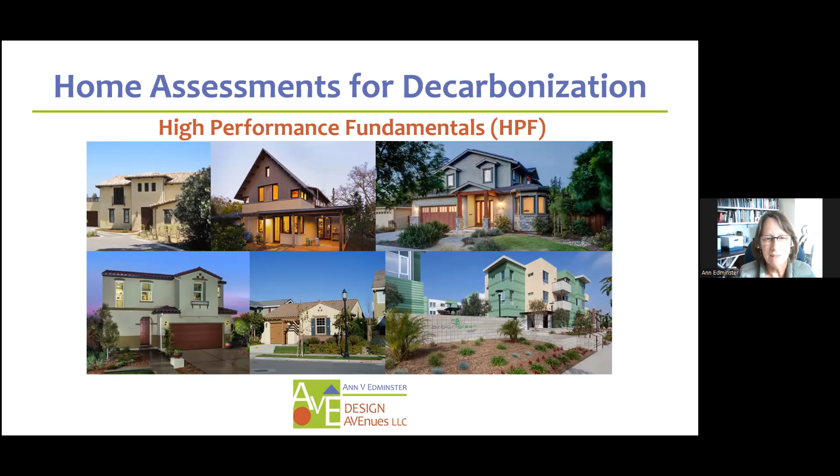So I just wanted to start with a little bit of setting expectations about the background that you all bring to this class, because we would love to be addressing a range of experience with the High Performance Fundamentals series. And so we do anticipate that anyone who's managed to get themselves here today has some knowledge and experience with buildings and systems. Ideally, you will have already participated in the first 5 classes in the High Performance Fundamentals series, although that is not necessary, but it will certainly give you a great foundation for what you'll hear today.

You may or may not have deep background in high performance building work yourself. But again, if you've gone through the High Performance Fundamentals series, you at least have, I think, an excellent grasp of what that field represents.

In working with prospective clients, the idea is that you may not be able to do everything that they are interested in accomplishing with their homes, but that you'll be able to guide them in crafting a roadmap for themselves. And in doing so, you'll clearly identify what you can and what you cannot do within that scope. And things that you can't do, you will assist them in identifying other professionals who can. So that's just kind of a context piece, and then we'll move on to the actual content of the presentation.

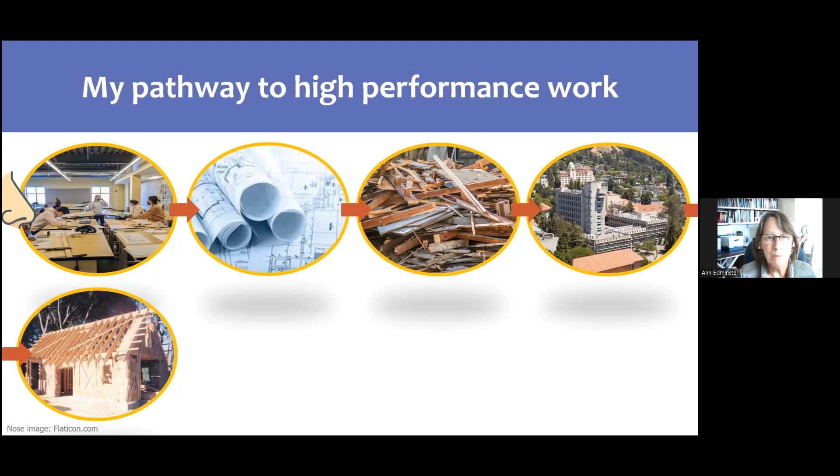So this is an aerial snapshot of UC Berkeley, where I did my master's work, where I focused on green building, which wasn't really even called green building yet at that time, but I chose to focus on energy, materials, and once again, residential architecture and sort of how all those fit together. During that time, I became really captivated with natural building methods. This is a snapshot of a straw bale building, one that I actually helped to build in those early days, the early 90s.

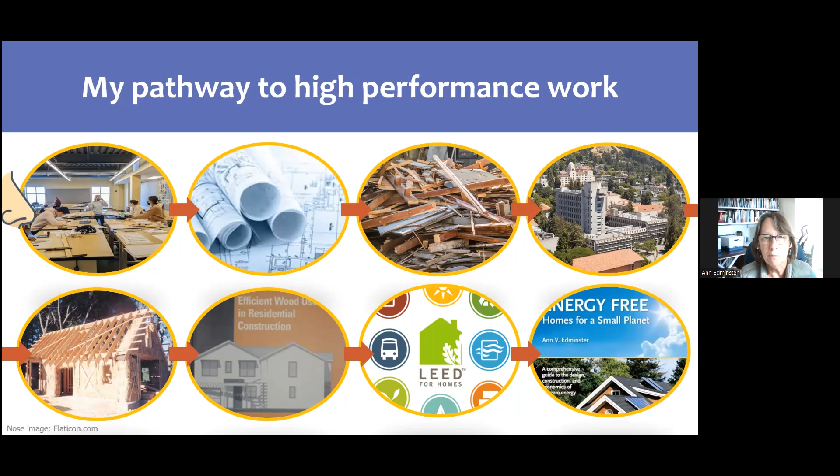Following that, I was recruited to work on the development of the LEED for Homes program for the U.S. Green Building Council. And that really broadened both my knowledge and my circle of acquaintances, and certainly depth of understanding about all facets of green building. It was tremendously valuable experience. And once the LEED for Homes program launched, I asked myself, okay, what's the next most important thing to work on? And for me, the answer was clear. It was climate. And that was back in 2008-9. And at that time, we were still using energy as sort of a proxy for climate in buildings. So I wrote this book, Energy-Free Homes for a Small Planet, which was published in December of 2009.

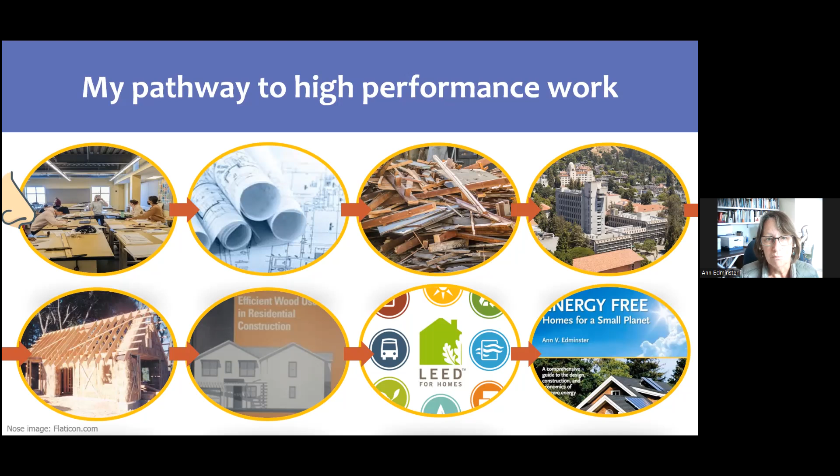And since then, I've been increasingly involved in education for the industry as well as for homeowners. So that led me through a long and winding path to working with my colleagues at 3C-REN, who have been tremendous partners in developing a lot of educational content. And one of the realizations of late has been, as the state makes its shift to addressing climate more and more aggressively, there's going to be more and more call for building professionals across occupations, whether it's trades, architects, engineers, energy raters, everyone sooner or later is going to be facing questions from their clients. What do I do to get the carbon out of my home, out of my lifestyle? So essentially, that's what brought us to this point today.

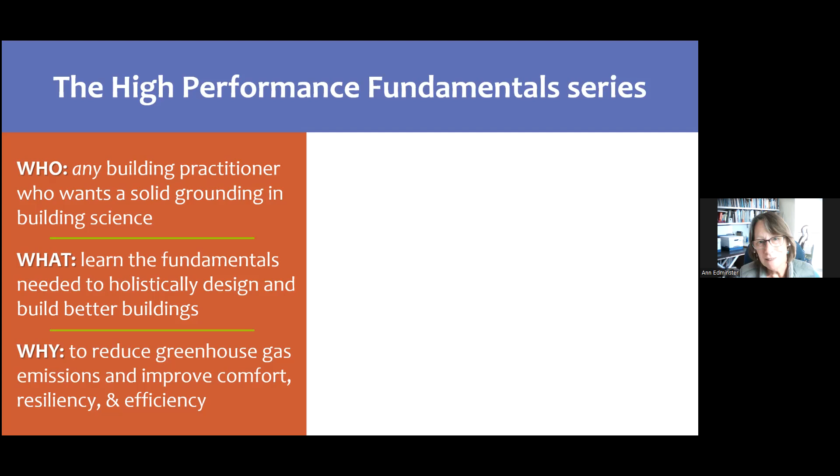Working with the 3C-REN team over the last couple of years, we've developed this High Performance Fundamentals series, working on the premise that building practitioners, broadly writ, will need, and hopefully soon will want, if they don't already have it, a solid grounding in building science. What that will enable them to do is more holistically look at the design and construction of buildings to produce better results that reduce greenhouse gas emissions while also improving comfort, resiliency, and efficiency. So that's kind of why we're doing what we're doing.

The result of that is this High Performance Fundamentals series, or HPF, classes 1 through 5, which you've probably already encountered or at least heard about through 3C-REN promotions.

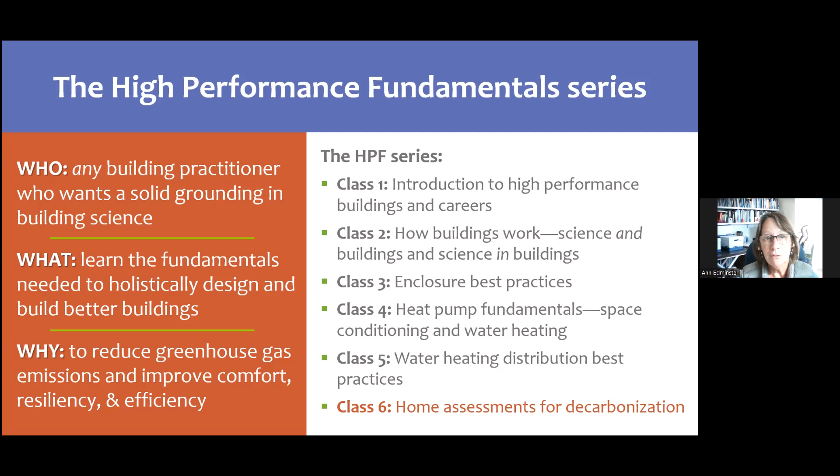And this one, the culminating class, ties it all back to the state's climate goals. Every homeowner, and some home residents who don't own their homes but will try to influence landlords, will be wondering what it means to decarbonize and how to go about that. Many of you are likely to be asked to assist in that process at some point in the foreseeable future.

In addition to the class series 1 through 6 that you just saw outlined on the screen, there are other elements we're talking about developing to enrich this program and enable participants to go much farther. First, we're going to offer a formal certificate of completion that will allow anyone who's taken all 6 classes to demonstrate to an employer that they've acquired this fundamental knowledge. We've heard from many stakeholders in the industry that they wish more of their prospective hirees had this background.

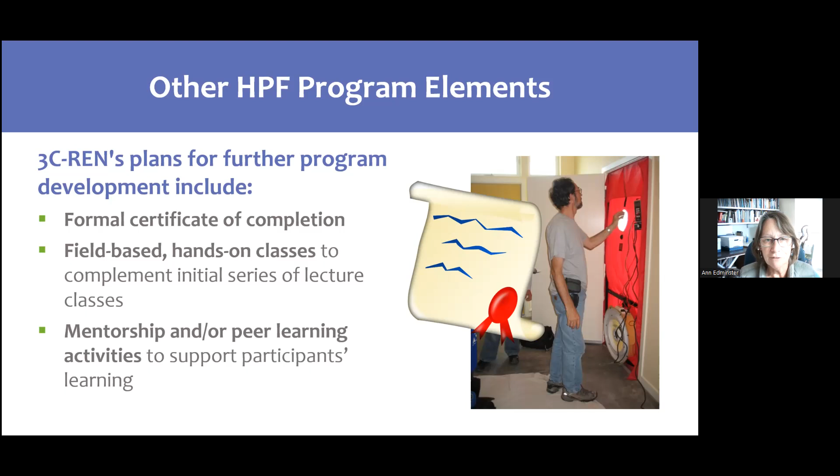And also a set of mentorship and/or peer learning opportunities that will support learning, not just in the classroom, not just on the job site, but through exchanges with other folks working in this field. Because we all learn from each other, and as much as you may have learned already, there's always more - it's a rapidly changing field. A very exciting field to be working in.

I've worked with Building Science Corporation for a couple of decades or more and have enormous respect for the pioneering work they've done, including a ton which is in the public domain because it's been funded through the US Department of Energy under the Building America program, among others. Building Science Corporation, buildingscience.com - I should have included their URL - is an amazing resource. I haven't actually included that as a link, but would certainly encourage all of you to go to their website and browse around, particularly the nerdier among you. I know there are some nerds out there.

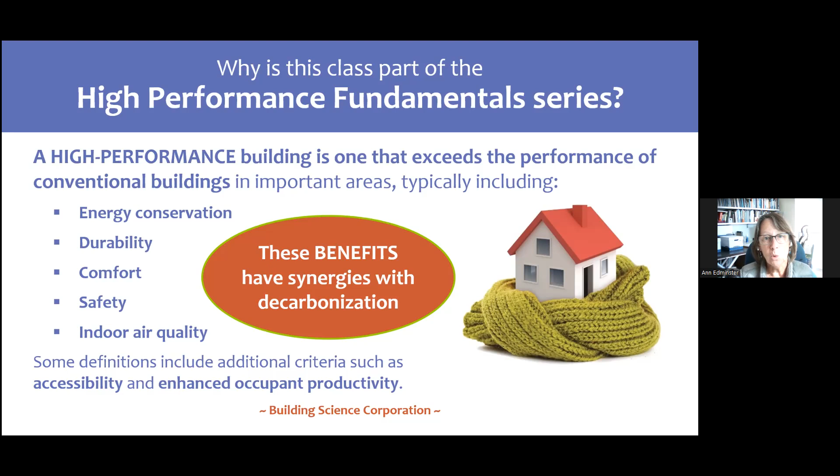So a little bit about those synergies. When we switch from gas to electricity, if we don't address high performance, we're missing these opportunities: we're missing the opportunity to reduce the necessary size of heating, ventilating, and cooling equipment we need. We're spending more money than we have to on that larger equipment. We're also committing our clients to eternally higher utility bills than they otherwise would have. And we've failed to resolve potential comfort issues, indoor air quality deficits, and condensation risks that may exist, and in fact do exist in many, if not the vast majority of, existing homes.

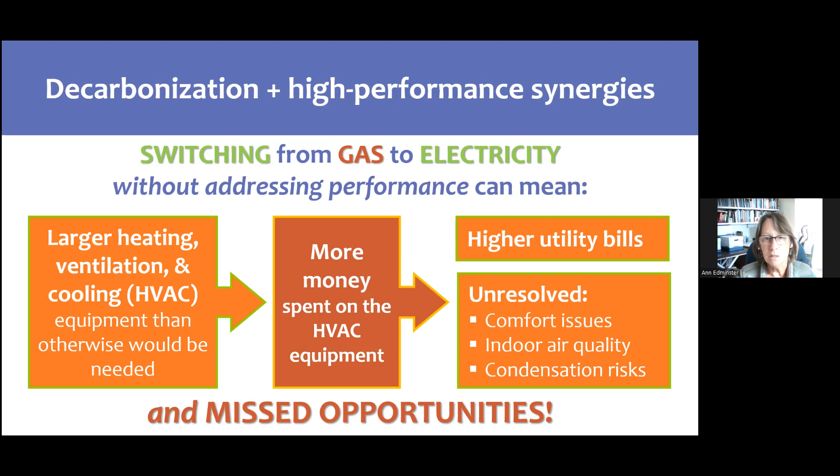So this is a really important opportunity not to overlook. That said, we won't be able to resolve everything. Existing homes are complicated creatures. So what this class will set you up to do is give you a process framework to walk through the mapping process with homeowners to create an electrification pathway.

We won't be delving deep into details of all these steps. It won't answer all the questions, so it won't make you an expert, but it will help you meet your client's electrification needs, whether directly yourself or by setting them up with this map of what to do next. And it will help you identify other resources, not just information sources, but people who can help the homeowners complete their projects.

So setting off on that question, well, when will decarbonization happen? Is this a tomorrow thing? Might be yesterday for some of you. But I think it's worth noting that there are more than 60 local jurisdictions just within California that have already tackled decarbonization of new construction. And the vast majority of those are already looking ahead and saying, okay, how do we begin to decarbonize our existing homes? So the majority of the existing housing stock.

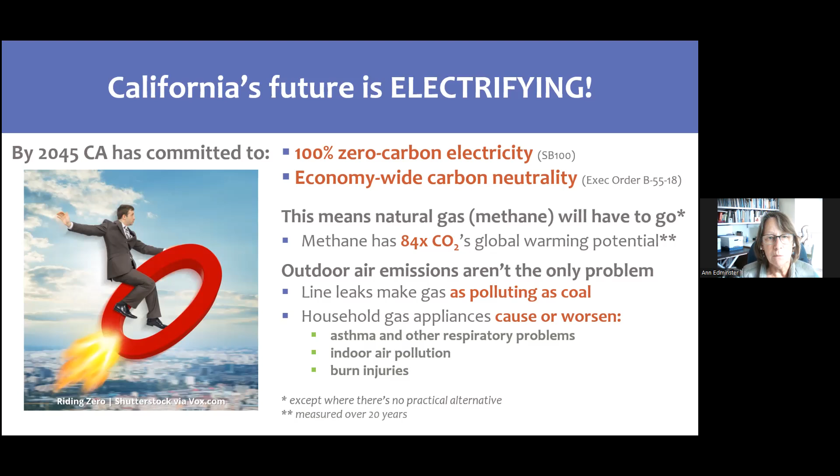So we have strong reasons to be moving towards electrification. And I think there are also great reasons professionally for looking at your future as being electrifying, double meaning intended. So we're seeing very fast changes happening, as I indicated with the local jurisdiction movements. There's an opportunity to really specialize in decarbonization - too many syllables. And some firms are beginning to do that already, and those firms are incredibly busy.

And they are offering those who are moving towards that specialization the opportunity to really focus on good work, making your clients' homes healthier, more resilient, and safer, as well as more planet responsible. So it's exciting to see these new business models emerging, and it takes some courage to step out and attempt that. But as I said, everyone I know who's working in this sphere is pedaling really, really fast, and many have months and months of advanced demand for the services they provide.

So now, why are clients asking for this? Certainly, a lot of the front runners, the early adopters, are driven by the mission. They're very concerned about climate change, whether it's looking to what their families are facing in the future or globally. So even single people who have no children, no prospect of grandchildren ever - it's all about the planet.

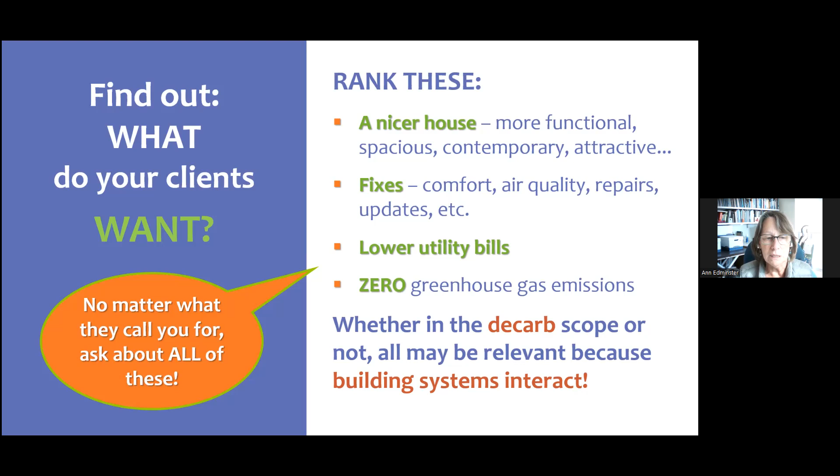Utility bills, important to a lot of people, not so important to others. Greenhouse gas emissions - obviously this is a whole mixed bag, but it's really good to put them on the table. And again, the big reason is the bottom line: building systems interact. So if you don't know what all they might be contemplating, you may miss some interactions that are really critical.

So it's also important to make sure that everyone involved in decision making is part of the conversation. This is a little dialogue I've seen played out in many variations across many households. One party in your client household may say, yep, this really isn't my project, just talk to my partner because I'm too busy to be involved, or I don't really care, I'm kind of oblivious to things around the house. Don't believe it, because next thing you know, 6 months later, 6 weeks later, you might find them saying...

...but this is something that really bothers me, or no, I didn't want that. So it's really important - I can't even tell you how many times I've found that households are not always on the same page with one another as to what they want or how important something is to them. So be sure that you do hear from all of them.

And then again, prompt for things that are specifically high performance issues, but that may not occur to them. People often view their homes sort of like their pets - they think they have personalities that they don't really have much influence over, but you know better. So ask them about these issues. Okay, so that's all set up.

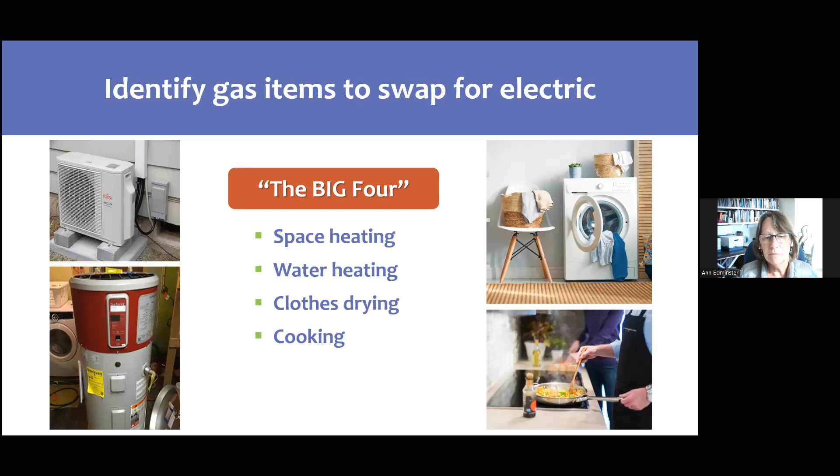And then we move on to the decarbonization nitty gritty, the crux of the biscuit, as an old friend of mine used to say. So when we talk about decarbonization, we're definitely going to be asking about what we call the big four appliances. These are items that generally, or very frequently in California mixed fuel homes, are run on gas: space heating, water heating, clothes drying, and cooking appliances - very commonly run on gas in California, not the same all over the country.

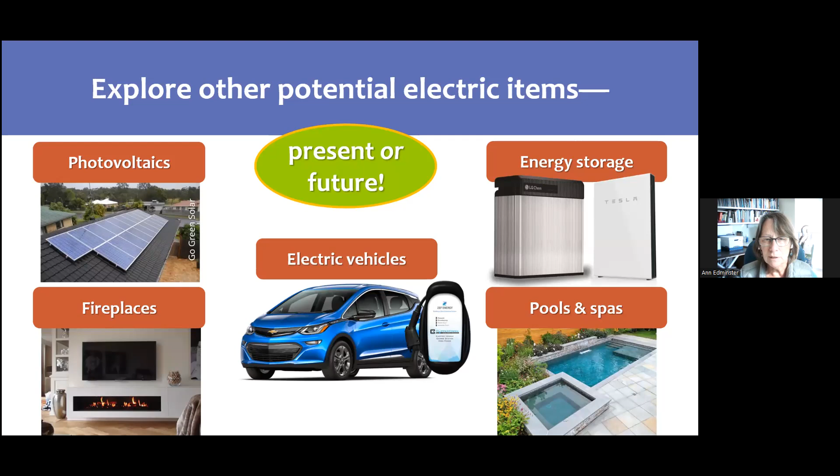So also find out if there are any other major electric items that are either already part of the home or are planned for the future, because if you're going to be planning around electrification, then these are going to matter to the overall picture. So then we want to set expectations with clients.

So we're going to go over the benefits of electrification, of course. There are potential challenges, and you're going to want to be able to address those potential challenges.

Some people may say, well, I'm worried that if I electrify my cooking, I won't be able to cook in a power outage. I'm not going to talk you through the solutions to that today, but there are tons of great classes being offered all over the state now and beyond about all the ins and outs of electric cooking and how to address those types of issues. So you're going to want to understand them, be able to communicate them effectively. Whatever challenges they may raise, you want to be able to respond to effectively.

Ask about budget and timeline. I found a lot of clients don't really want to be candid about their budget. That's not good, because if they're not candid about their budget, it's going to be very hard for you to understand to what extent you can help them pursue their goals, or do so effectively.

I've learned this lesson through painful experience. So I don't let clients not give me an answer, and I write down the answer. So if things change later, I can say, oh, that's interesting—this is what we talked about when we started.

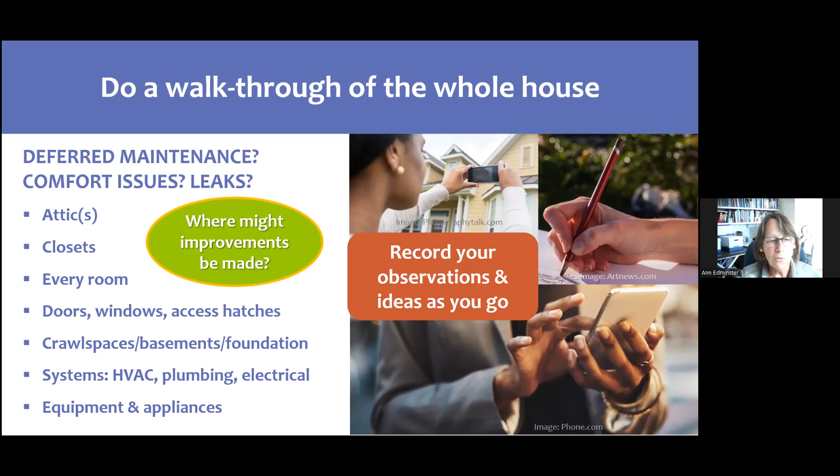And this might include things that your clients didn't bring up. So it's just a very comprehensive walkthrough of any performance type issues. In particular, you want to look at the electrical panel.

You want to do your best to figure out what the situation is now in terms of the panel capacity, any available breaker areas. The delivered amperage might be different from the panel rating. Now, this is something you're probably not going to be able to tell just by looking at it. So if there's any suspicion that less amperage is being delivered than is indicated by the rating of the box, you may want to get an electrician involved sooner than later.

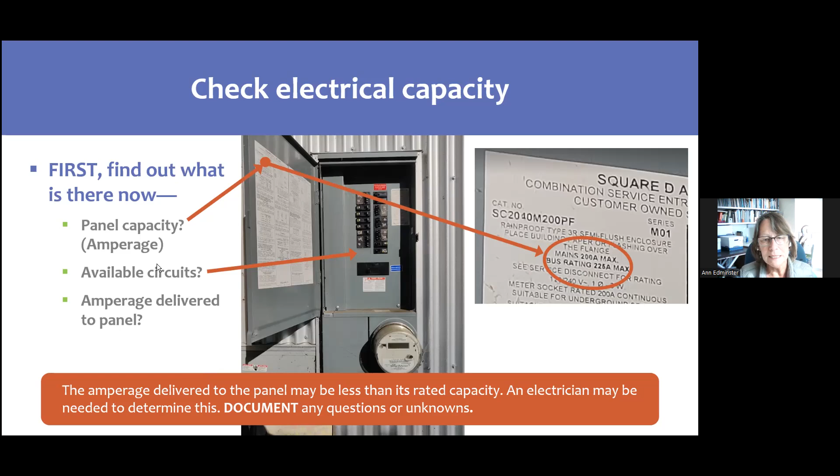Now, one clue of this might be if there are a lot of open breakers. But again, this is not something you're going to be able to tell, just make an observation about it.

Okay, then you're going to want to look at these specific locations of items that are going to be replaced, gas items are going to be replaced with electric, and find out what kind of electrical outlets there are.

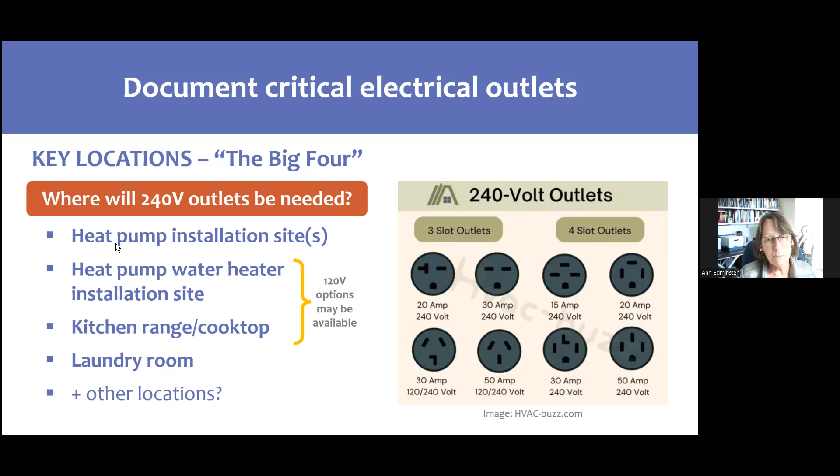Now, not every replacement electric item might need a 240 volt outlet. There are 120 volt outlet options available for heat pump water heaters. Soon, we are being told that we're going to see kitchen ranges or cooktops on the market at 120 volt options. Not necessarily today, but in the future. And I believe there may also be a dryer, or perhaps it's a combo washer dryer option, that's 120 volt. So be aware of what's there, document it.

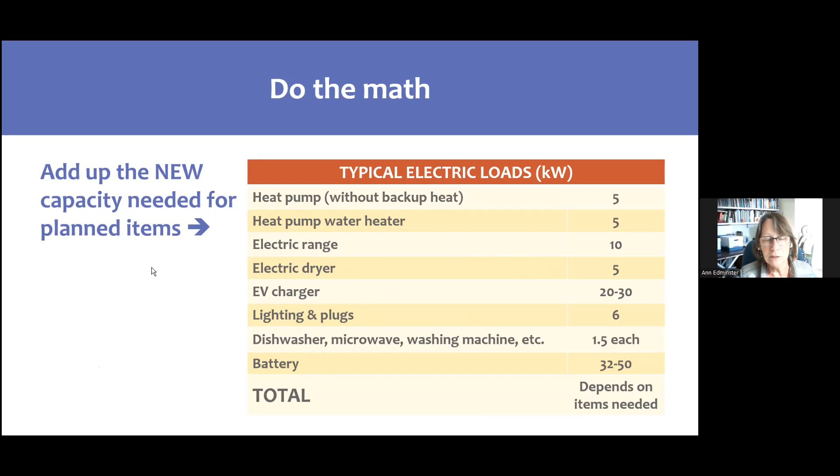Okay, and then add up the load needs for new items. Obviously this is a fairly lengthy list. Not all of these things may be part of the plan, so your total is going to vary by project. And again, recognize this is just a preliminary estimate. So unless you're an electrician or doing the actual work, this will be an estimate.

Some specific things to look for in the walkthrough, if space conditioning is part of the electrification plan, is thinking about where might we put a heat pump for space heating and cooling? Is a ducted or an unducted system going to make the most sense? Again, you may not be able to answer this question. It's a question to ask yourself as you look around.

Do you find ducts? Where are they? What kind of condition are they in? Do they look a little sketchy? Do you think they should be tested? Is there an opportunity to put an air handler within conditioned space?

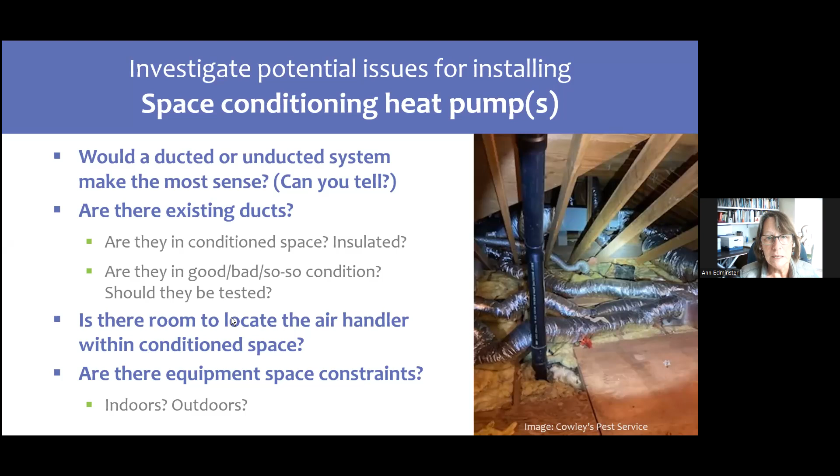If you don't have an air conditioner now and you're going to have a unit outdoors, is there space outdoors for that unit? So take a look both indoors and outdoors when you're thinking about the space needs or other needs related to space conditioning heat pumps.

Heat pump water heater also deserves a sharp eye to thinking about where it might go. Oftentimes, a heat pump water heater will be somewhat larger than an existing tank water heater. And the critical thing for heat pump water heaters is enough space to provide effective airflow, because they're doing an air exchange with the space in which they're installed.

So if space is constrained, think about what the options are. Different models have different specific space needs. Can the space be made larger? Can it be vented? Is there a different location, for example, than where the existing water heater is?

And depending on the location you're considering, noise may be an issue. They do make noise when the compressors are operating. Some units are noisier than others. I have a unit that's not particularly noisy. I was just visiting a friend and colleague this past weekend and saw his water heater, and when it was running, it was quite noisy. So there are differences. You're going to need to think about all that and perhaps work through some of those issues with the clients.

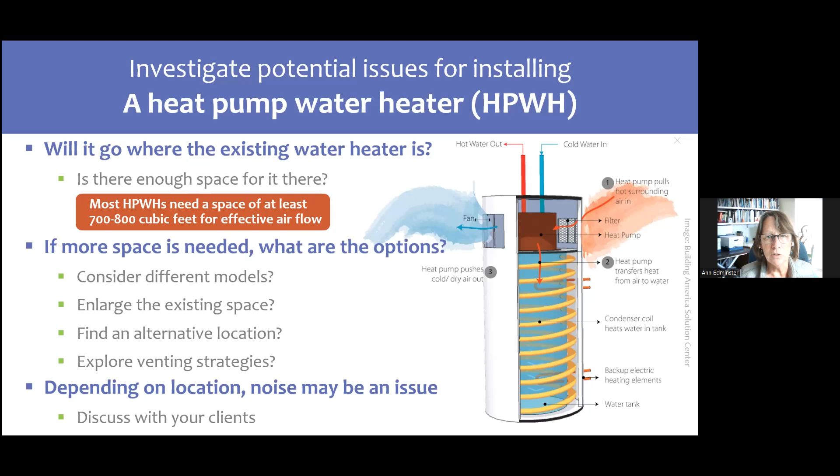Now, another thing to look for is opportunities to reduce demand, so that we're not going to be putting in space conditioning equipment that's larger than it might need to be otherwise. Some of the easiest opportunities to reduce demand are to replace dated lighting and appliances.

And if you don't find what you need, you can always go lower. But you can see they also provide information on the site showing potential rebates available, cost range, and you can also do things like use their search engine to put in space constraints. So if you need a smaller than usual or some weird size for a particular appliance, you can search on those type of parameters as well. So lots of great resources here. Again, these links will be available to you after class.

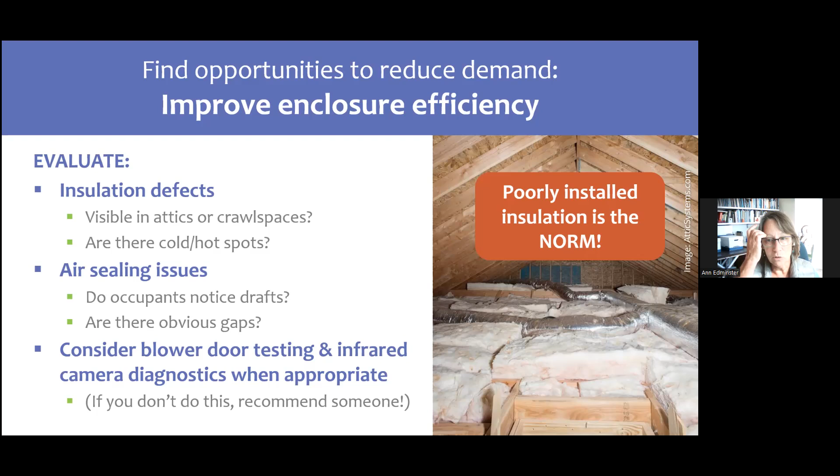More opportunities to reduce demand. Working on enclosures is generally more expensive, more complicated, requires more effort on the part of the client, and maybe in some cases more disruptive to the household, depending on what may be needed. But good idea to look at what these opportunities might be. So you're going to be particularly interested in insulation issues, air sealing issues, and whether or not various diagnostic testing can be helpful in determining whether there are these issues in spaces that are not directly visible. So have a look around at the enclosure.

Another important part of the enclosure, of course, is windows, and windows can also have a tremendous impact both on thermal performance and comfort, also on architecture. So rarely do people tackle a substantial remodeling project purely motivated by decarbonization. They usually have something else in mind too. Often it's architectural improvements, and windows are often a place where you can yield great improvements in all of those parameters. So they're definitely worth raising, particularly if you find that there are some older windows, aluminum frames, single glazing, kind of leaky. Not the cheapest thing you could ever do, but can have very high benefits, both energy benefits and comfort benefits and architectural improvements. So a lot of this depends on your client's sensibility.

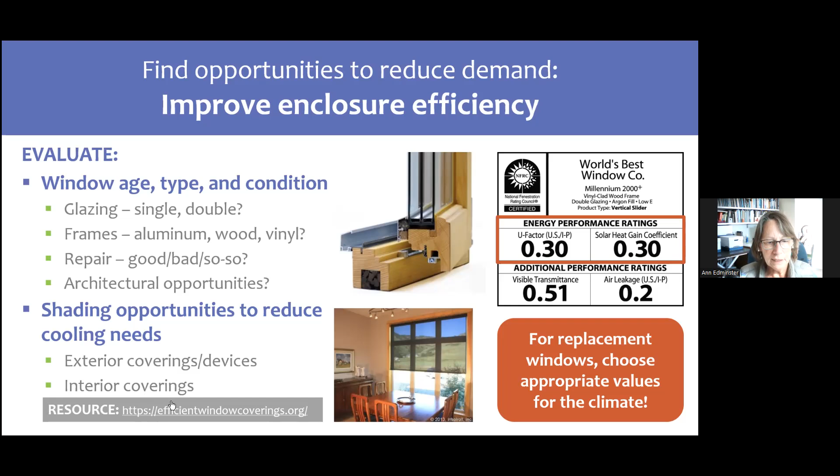Shading windows can also be very important in climates, and that's these days most of California, that at least occasionally experience extremely high temperature and cooling demand. Even more important if there's not cooling in the home and isn't going to be. If you install a heat pump, you will get cooling along with it. Nevertheless, that's not going to be in everybody's future, or not immediately. So worth looking at opportunities to provide shading. Exterior is most efficient, but when exterior shading is prohibitive, whether logistically or cost-wise, there are interior window coverings that do provide some benefit from a shading perspective. And there's a link here at the bottom left to find out more about that.

Okay, other opportunities to look at. Water features are not the most common thing, but nor are they tremendously uncommon. And when they are heated, they are often heated with gas or propane. So these are decarbonization opportunities that should certainly be looked at if there are pools or spas or other significant water features on the site, or if they're in the plan. Now, there's an important caveat here. This is arguably one of the most challenging aspects of decarbonization when pools are part of the equation. And again, I speak from direct experience working with clients who wanted decarbonized pools, that is non-gas fueled pool heating. And what I found is that the expertise on this is thin on the ground. And so if you want to accomplish this, you really are going to want to find somebody that has prior experience doing electric and/or solar pool heating.

And by the way, solar can do an excellent job if you're only heating during the summer. If you're intending to heat when temperatures are cooler, then that's probably not going to do the job effectively. And that's when you're probably going to want to look at heat pumps or the combination of heat pumps and photovoltaics. Current research is indicating that's going to be the most cost-effective approach. But again, there are a lot of variables that determine this: size of the pool, water surface area, volume of water, specific climate, specific intended use patterns. So this is definitely a place where I recommend adult supervision. By that, I mean deep experience in doing this work.

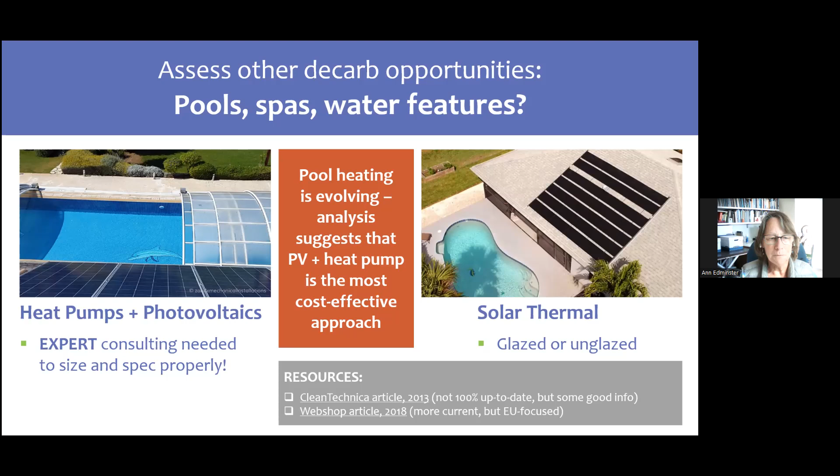This is a good one to talk to vendors about, because we're seeing more and more solar vendors venture into the battery space. And that's where, honestly, the deepest understanding is about this. I will add, for those of you who don't have anything else to do this afternoon, a colleague of mine who is a battery expert is teaching a wonderful hybrid, that is in-person and online, class this afternoon through Sonoma Clean Power. I think that class is maybe at 4 o'clock, and it's taught by Chris Caldwell, super smart guy. You can totally nerd out on batteries this afternoon.

I just thought about that. I'm going to attend. I'm real excited. I've seen Chris's class before and really can't get enough of it.

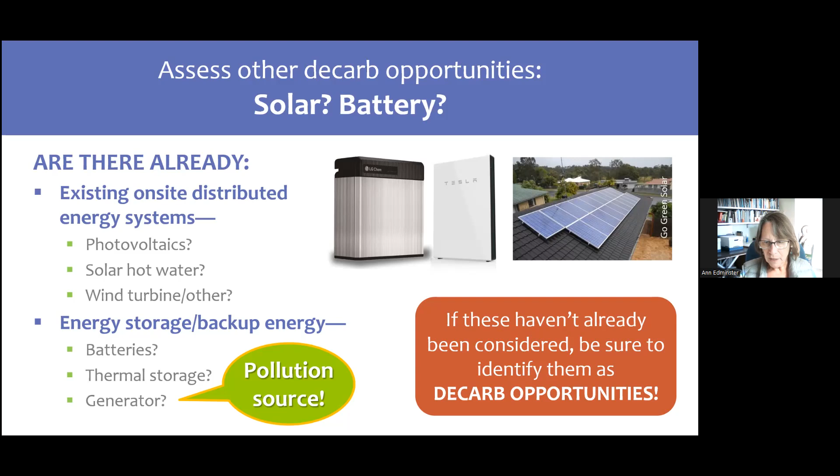Okay, so moving on. So you're documenting your findings. I really recommend creating a formal report, but keeping it as short as possible. People are pretty impatient these days. They want to cut to the chase. Be sure to use simple, non-technical language. Those of us who are in the industry tend to forget about people who aren't in the building industry. There's a lot of language that we use that is everyday for us, that is unfamiliar to our clients.

Once again, clarify within your report what you can and would like to do, what you recommend being done. So these are the things that you think are very much in line with your client's budget, timeline, goals, and expectations, and perhaps other things that you suggest they might consider. Include the good, the bad, the ugly, and the real opportunities that you see, and then resources. Take lots of pictures, by the way, when you do your walkthrough, sketches as needed, diagrams, and so forth. All this is really helpful in having your clients understand what their pathway is going to look like.

Okay, so what are you going to recommend? Here's some thoughts about developing recommendations and priorities for those solutions. First of all, recognize that what you're balancing is your own industry knowledge and experience against your client's budget, timeline, wish list. I've encountered a lot of folks in the building industry who skew heavily towards the client's wish list and don't necessarily share the depth of their knowledge and experience. I think this is a real mistake, because you're being hired because you have a unique skill set to bring to bear for the client. They don't know what you know. They're not going to know it unless you share it. So I think it's really important that both of these show up equally in the recommendations you provide.

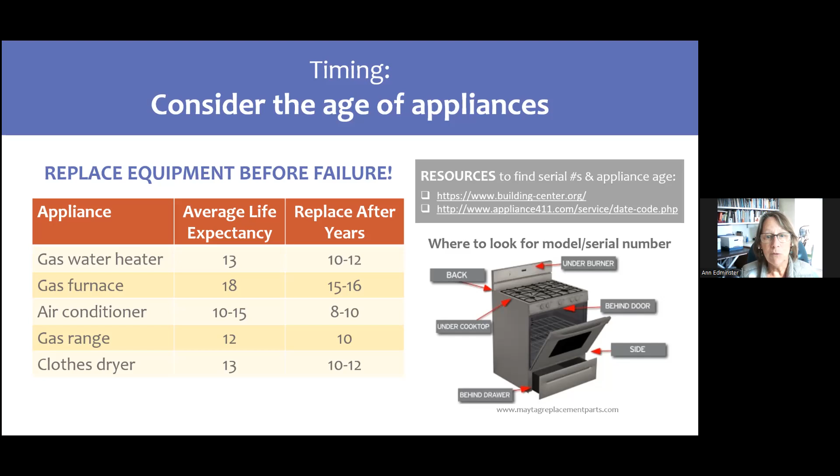Also want to mention that I have a number of colleagues who work in this decarbonization world with me who believe passionately and want to make all of these measures in their own homes and have themselves experienced these inopportune equipment failures and actually been unable on short notice to get the electric items they wanted because of challenges with the labor pool and product availability. So this is another reason to plan ahead and make these replacements before the failures occur. Okay.

Also, there's some synergies in some of these load reduction strategies. Again, I can't emphasize enough that enclosure improvements can make it easier to do a really great job with HVAC systems, enabling smaller capacity, enhancing survivability in power outages at the same time, and also reducing future utility bills. So what's not to love about that, except the pain in the neck that may be associated with enclosure improvements, nevertheless important. And then remembering that HVAC distribution system improvements, not just the equipment, but the distribution system, can double system performance, cut demand in half, and improve comfort substantially.

And just to be clear, when I say distribution system, usually with HVAC, that means ducts. And normally, when people think in terms of the efficiency of HVAC, they really are just thinking about what's the efficiency rating of the box, the piece of equipment. But that's only part of the equation. So that's another big opportunity to look at.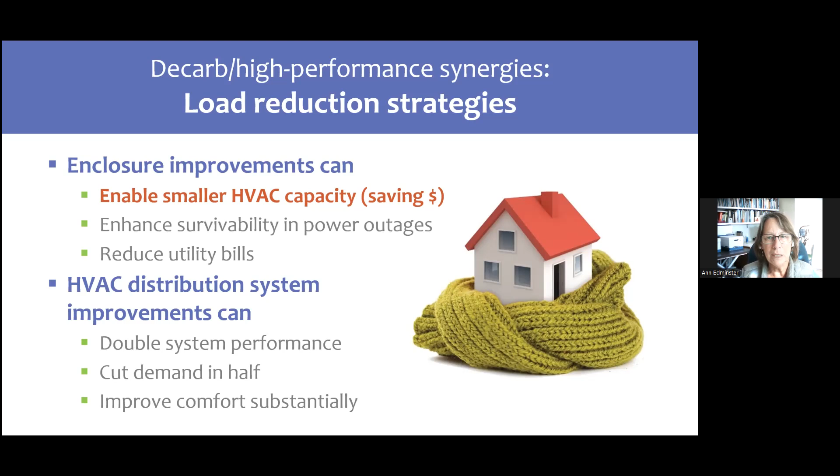Okay, something else to think about is if for whatever set of reasons, a panel upgrade seems likely to be needed, and yet a panel upgrade is not desirable. And that could be for a couple of reasons. One, there could be costs associated with it that are difficult for the client to undertake. Secondly, there can be considerable delays associated with panel upgrades or service upgrades to the home. Or thirdly, just to reduce the demand on the grid, which is a worthy goal and something that some of your clients may bring to you or you may raise with them.

For any of these reasons, it may be desirable to look at some of these, what we call diet options or smart options. So the diets are sometimes referred to as a watt diet or an amp diet. It's basically looking at equipment options that have a lower power draw. So that includes some options, the condensing washer dryer option or the lower amperage, lower voltage heat pump water heaters. This is not exhaustive, by the way, and more options are being added to this menu on a pretty frequent basis. And then secondly, smart technologies.

So a smart panel is what's referred to as an automatic load management system. And what it can do is it can apply an algorithm to the various things that are pulling electric power in your home so that the big draws don't overlap each other and cause you to need more amperage than your panel capacity allows. And there are a lot of control options available with those. So that's a good option to look at.

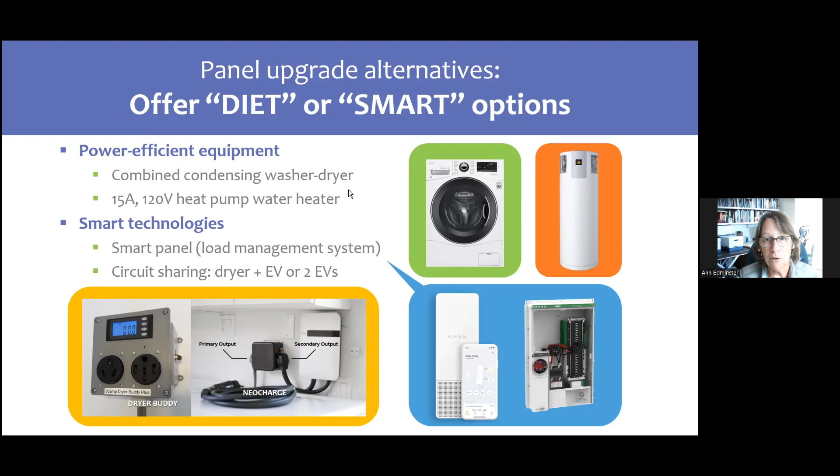If your needs are more simple, for example, you have two EVs and you don't have enough juice to power both of them at once, or you might have a dryer and electric vehicle that could share a circuit and the EV charging could pause, for example, when the dryer is running, then some of these simpler devices might also be helpful for your clients.

Okay, some other things to look at when you're thinking of opportunities to recommend to your clients are, where might there be some other synergies? So something to look at that I've encountered is if you have vented attics and crawl spaces, if you're looking at installing heat pumps for space conditioning or ERVs, HRVs, energy or heat recovery ventilator systems that would function better in conditioned or semi-conditioned spaces, there's an opportunity to change those to unvented and conditioned or semi-conditioned spaces. Also, removing those vents makes them more wildfire safe.

If wildfire smoke is a concern for a given location that your clients are living in, then they may be interested in getting an active ventilation system, so heat recovery or energy recovery. That's going to be less costly to install at the same time other HVAC work is being done.

I've encountered projects that had siding in really poor condition. In those cases, I've worked with clients to say, well, let's pull off the siding. That's an expense you're going to be facing anyway. At that point, we can do a good job of air sealing, replacing the cavity insulation, and sometimes adding a continuous exterior insulation. All those measures add up to a vastly improved building enclosure compared to what was there before.

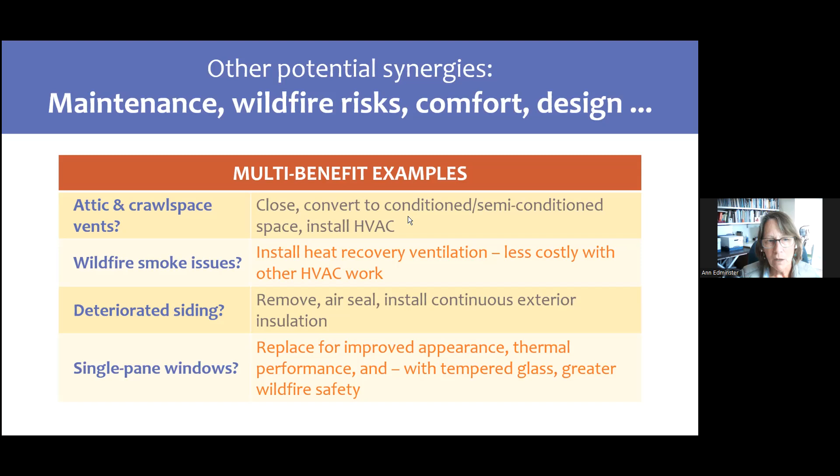Okay, so now what if the project needs to be phased? Then you're going to want to try to spell out the best sequence for implementation. I want to note my green type here on the left - these steps will vary based on the project specifics. So this is just an example, but something you might want to work on is, first of all, defining the broad scope of the project, so what you want done at the end of all the phases. If there are any buried systems, things that are hard to get to, those are often important things to work on first.

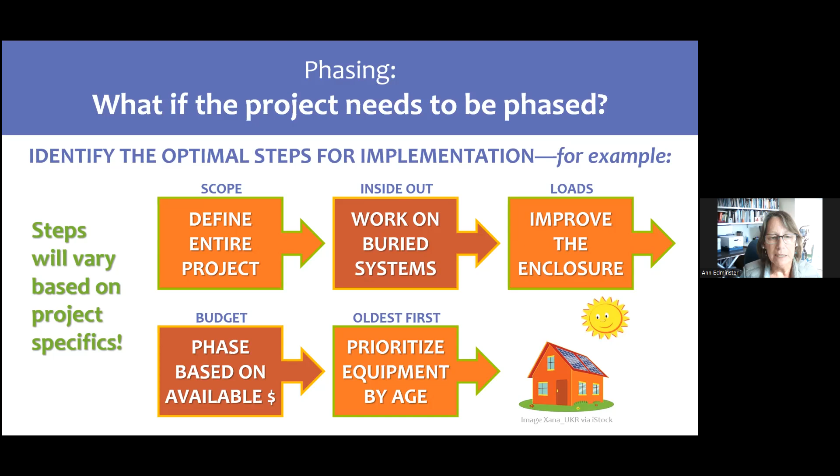Reducing loads by improving the enclosure is often a logical next step. At that point, you may be phasing based on budgetary constraints, so as a given amount of money becomes available, one or another next step may make more sense. Sometimes, again, it might be prioritization by equipment age. So again, be sure and customize these based on the specifics you've learned about your client's project.

Okay, so beyond what you personally may be able to do in terms of the actual implementation of the electrification or decarbonization scope, you want to recommend others if there are tasks that are beyond your scope. And this is just a list of folks that may potentially be useful.

And I really want to emphasize the point on the right: you will only want to recommend people that you know and trust. You know something about their work, either directly from having worked with them yourself or through others that you know and trust who have worked with them directly.

I always also recommend that clients check references. And there's a funny phenomenon that I've learned about references over the years: a service provider may give references to a homeowner, thinking that all of these people are going to say glowing things about them. Come to find out, they don't always have glowing things to say. Well, why would they think they did a great job if the homeowner didn't think they did a great job? I have come to believe this is related to something like the Stockholm syndrome, where captives become so fearful of their captors that they're very friendly to them.

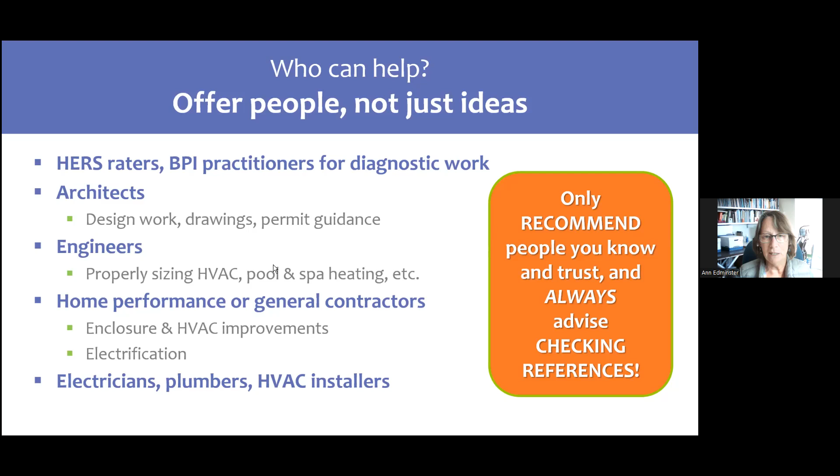So anyway, all of this leads to the absolute necessity of having references checked on pretty much every single occasion. Also, I have found that there have been people who've done a great job, and then for whatever set of reasons, their work may deteriorate over time. So a reference that was good five years ago might not still produce the same results. Long story short, this is a step not to be skipped and a warning to be shared with clients.

So that's my wrap up of resources, and we have plenty of time for questions. I'll be happy to take any that may have come up.